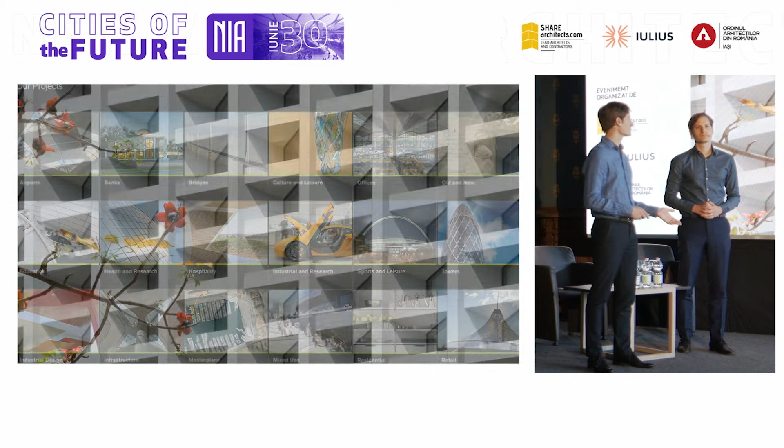Everything you'll see here is our colleagues, it's our buildings, it's our way of working. I hope this explains a bit of how we work.

We have always believed that great design makes a difference. However hard, however uncertain, we still believe in that truth, that in some way we can contribute to a better world. By further pursuing our holistic approach, by entrusting in our people, we lay the foundations today that will help you design for a brighter tomorrow.

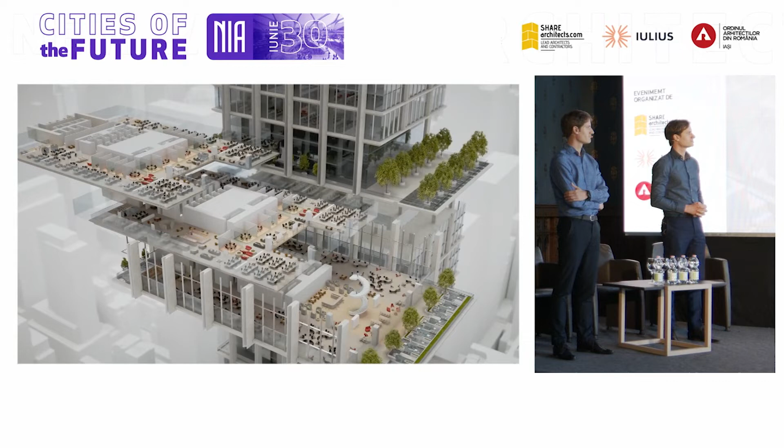Diversity leads to richness, inclusivity, strength, collaboration. Our future leaders stand among us today, those who dare to dream, those with ideas that reach far into the global community. They will carry this responsibility into a future yet unknown, redefining travel, mobility, the way that we work, the energy that we harness, the medicine we develop, the cities that we build, the planets we will inhabit.

Creating a balanced world of nature and humanity, where creativity, connectivity, and sustainability drive our society, working alongside the catalysts of change, the thought leaders, the vision makers, the game changers.

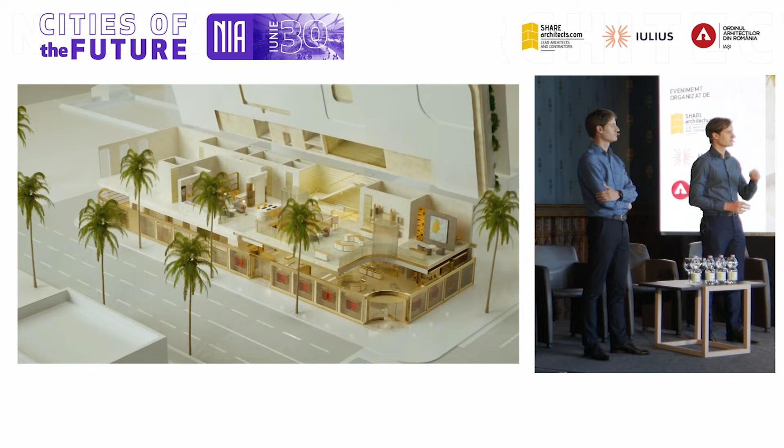We endeavour to improve ourselves, to nurture a workplace you can be proud of, to acknowledge and meet the challenges of an ever-changing world. We are the designers, the innovators, the problem solvers, the drivers of what we will become. In your hands, the power to make a difference. We can be at the heart of helping to design a better future. We have come a long way, but the journey has just begun.

I think it's a good ending because it is one of our dear projects, the Apple Park. I think probably some of you know we worked for 7 or 8 years on that project. But of course we're here to talk about Iași, which has been an amazing journey for us - actually at the opposite pole in terms of how respectful and how careful we've looked at it.

So the few topics we'd like to take you through today about the project, about Iași, is why we love Iași, the context integration, the public realm, a bit about the development, the residences, and sustainability.

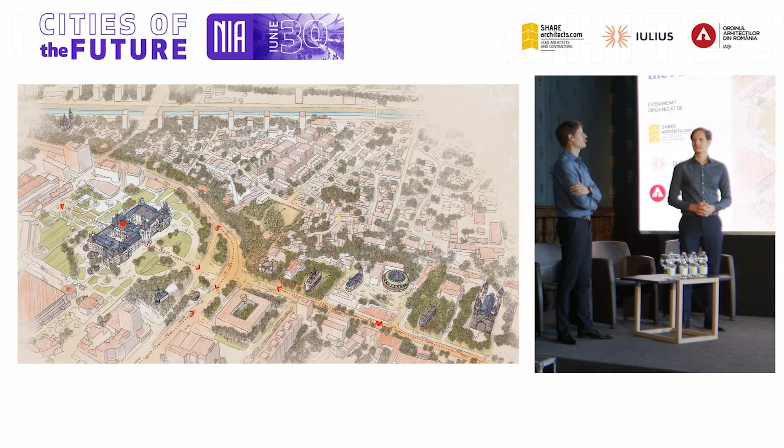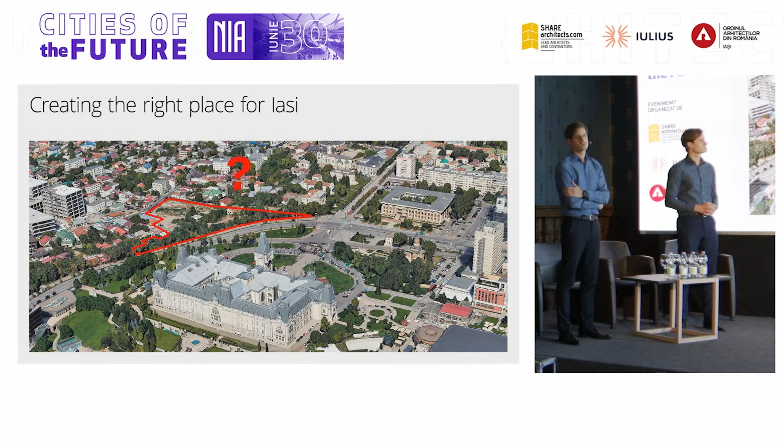We came here, we sketched, we know every single monument, every single street by now. It was quite daunting, I think for all of our colleagues, to figure this out, but there's so much going on. We're now confident we understand it all. We sketched the environment to get a sense for the scale, for the intricacy of details, and how people actually perceive the space.

So the main question is, what do we want to achieve here in Iași, and what do you require? And we mentioned this, it's a balancing act for us. It has to be respectful of its history, but also futuristic. It has to be respectful of the heritage, but visionary, and so on.

All these different components, and we have to find the right answer for Iași. It's not an easy answer, but we had some help. The Iulius group organized all this—without them nothing would have happened. But the people of Iași also gave their opinions, and we took that into consideration.

It has to be a place for the people, a sustainable city, a green city, a university center, and so on, but also, in a corner, an architectural icon. So we've tried to balance all that. The experts, the jury—we had a tremendous brief that helped us all develop the project. So all these came to mind: sustainable, friendly, nature, complex, historic, innovative, a catalyst—all of these.

So for us, the vision for the project, for Iași, is to be sustainable, friendly, residential, the public realm, a historic heritage, and a destination for the entire city.

So we went back to our London office with a lot of energy. This is our team—we built models, we sketched. This is our professor from Stuttgart sketching on the Masterplan. Nick Haddock, our head of landscape design, found out he's got relatives in Iași, so imagine how excited he was to do the landscape design, and so on with the sustainability team. We also reviewed it very often with our most experienced, most senior people.

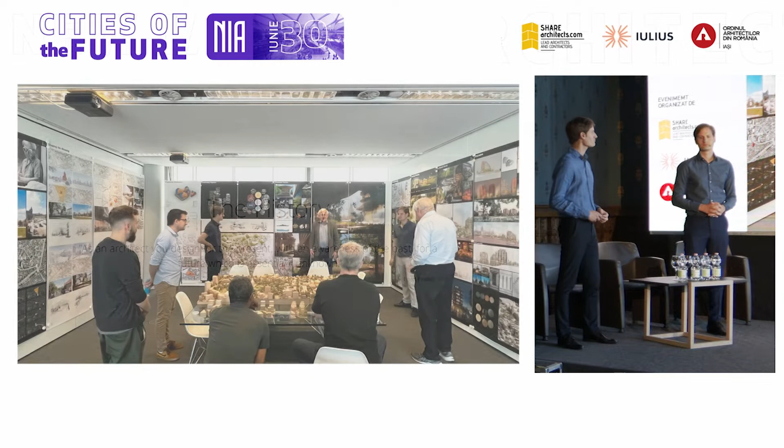So it all starts with history. As an architect, you design for the present with an awareness of the past, for a future which is essentially unknown—a quote from our founder, Lord Foster.

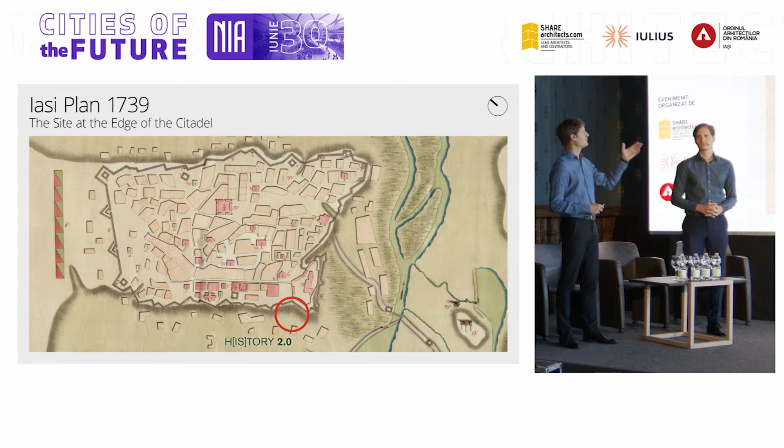So we did that extreme analysis, going into depth of what Iași is, and one of the key factors for us was that the site was always at the edge of the citadel, just outside its boundary. But it was also built closer to the front if you look outside where the current building is—it created a plaza. And everything beyond that was floodable, and actually almost a slum for many centuries.

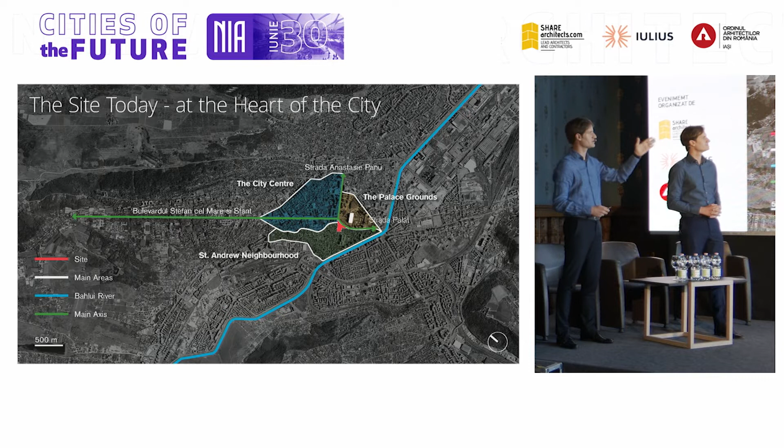When the river got channeled and contained, St. Andrew managed to grow and develop, and that was the opportunity. So now the site, because of that, is at the center of all these major axes and at the center of the city, and has amazing potential.

For us, the main idea is to bring life from the Palas Park all the way down through the heart of St. Andrew, down to the River Park, and make that also a feature in the future.

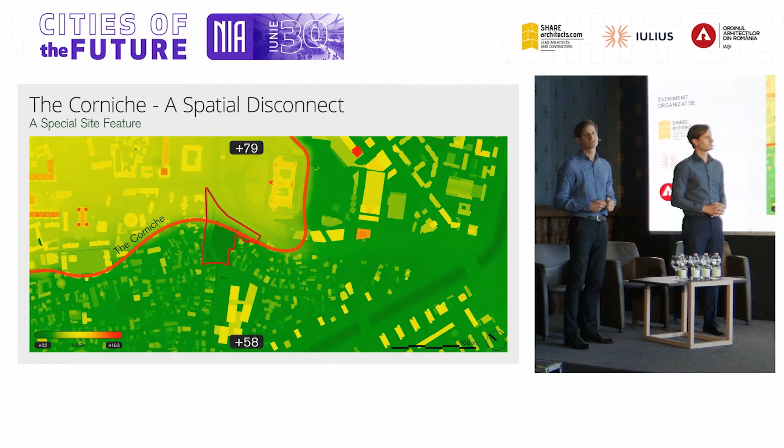We looked at the topography, and here we found this: you have a large level difference which goes all around. And you've seen how successful the slope is at the Iulius Mall—we have a similar opportunity here to create a southern and southwestern facing area for people to enjoy.

We looked at the streetscape and saw there's not much connectivity linking down towards the river. So the opportunity, which I think many recognized, is to connect through with pedestrian links, but also vehicular links, almost like stitching the city together.

Enhancing the public realm, lighting and orientation, the outward views for the apartments to ensure the best quality for the inhabitants, and stepping the gardens back.

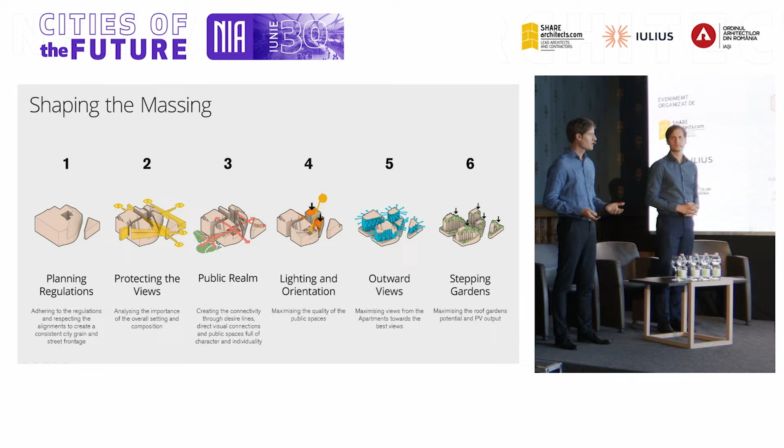So, almost like a sculptor, we started shaping the massing. The planning regulations are clear—we're personally very familiar with them, being Romanian, so for us it was quite easy to determine the setbacks and everything that had to be.

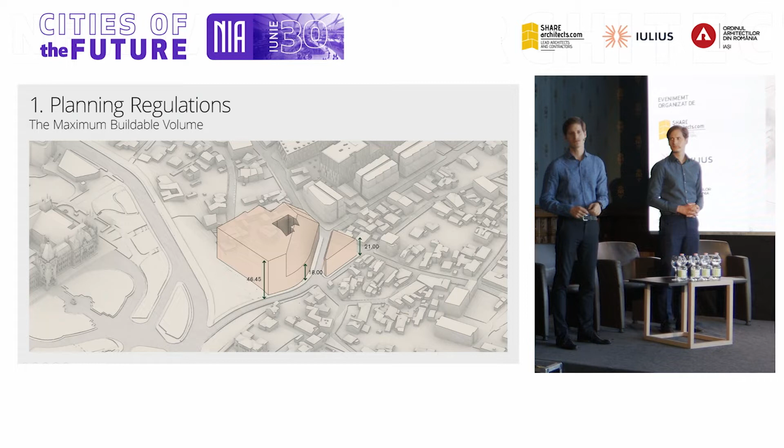This is the maximum volume allowed to be built on this site—a bit taller at the palace, gradually going down towards St. Andrew. That was already a clue for us, showing what the city is trying to achieve. So we started this view corridor analysis, and we did it really thoroughly, but we'll come to that.

We've predicted what people flow would do, what the desire lines are, and created connections to link the active zone from the palace place down to the river. And this resulted in further cuts through the massing.

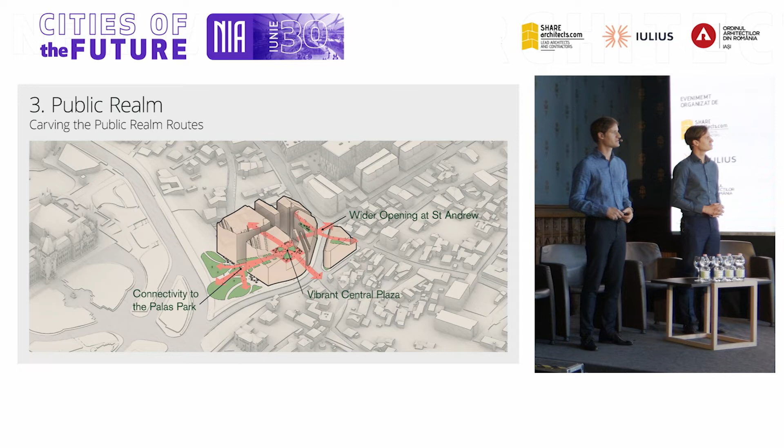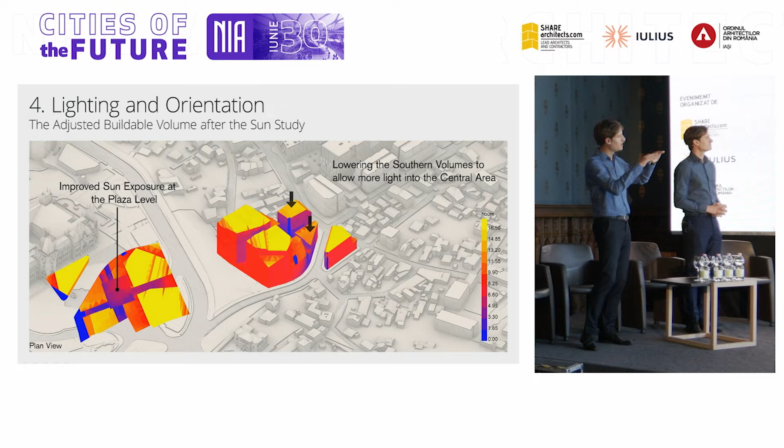Sun and getting light, the right quality for the spaces, but also for the accommodation, for the apartments, is really important. So we mapped the sun on this maximum volume and realized there wasn't enough light within that central plaza. There's a piece of the land which we're not allowed to build on, it's the regulation. So that for us remained unbuilt, and the result is by lowering those volumes substantially, we managed to get the southern and western sun.

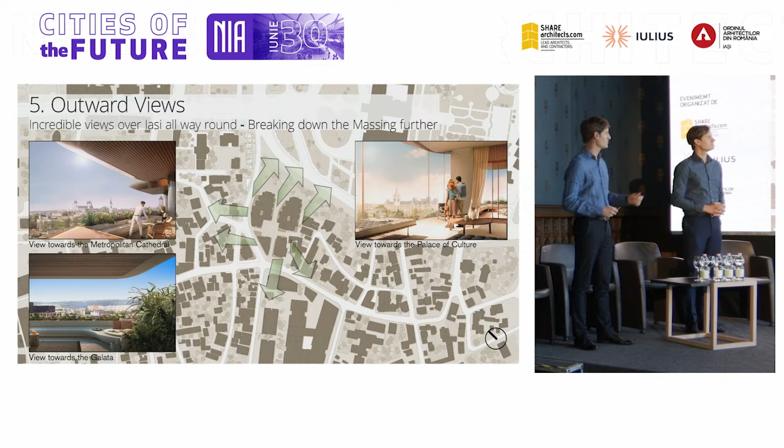This is the volume. And then, of course, for the apartments and the quality of those, the best views, looking at the palace and looking also towards the city and also Galata towards the south. And we've run that parametrically to study and prove that everyone has great views out.

The final step is this stepping terraces towards the St. Andrew Quarter. It's providing this landscaped environment, a garden, quality for the apartments, but also helps us run down towards a different type of grain.

We did loads of studies. We play with models, and we've tested them. And for us, we think there's almost like Cinderella's shoe - the building has to fit within the given parameters which we've studied.

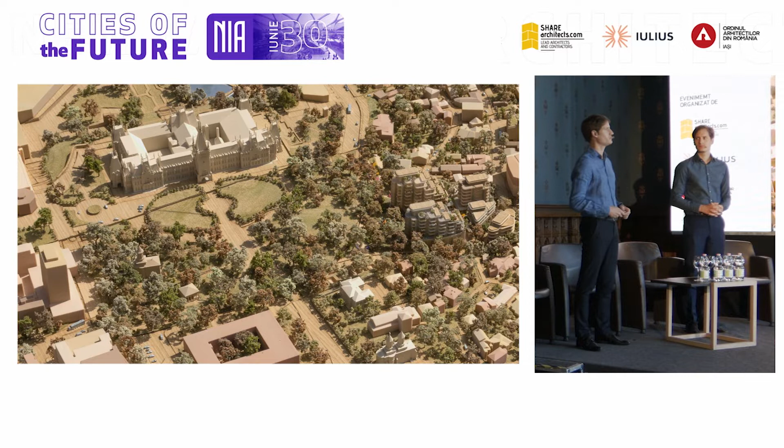Yeah, and this is another model. That's how we work. It's almost impossible for us to detach - it's the best way to look at it. There's a model downstairs, but we've done it ourselves as well, just to understand it better. And it has more context and more activation.

So protecting the views will go quite quickly. Everyone has done it, but we can assure you this has been studied in thorough detail. And there's protected views, sensitive views, and complementing views.

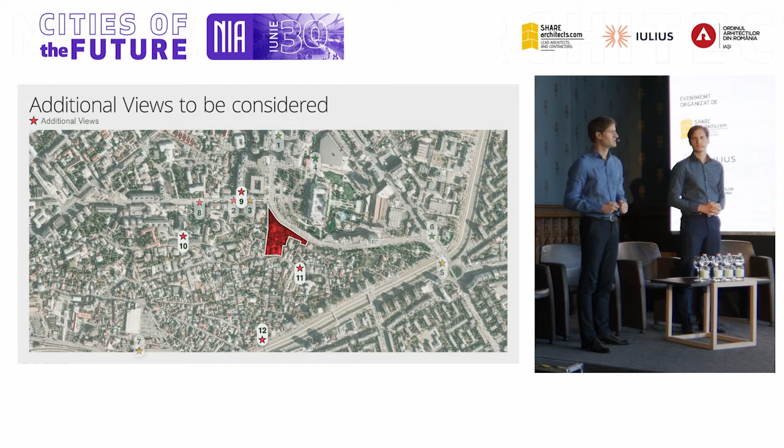All of Ștefan cel Mare, as you walk through it, you should never see the development. It doesn't matter how important it is, it doesn't matter how beautiful it is, you should never see it. So the massing in its state is always hidden behind the monuments.

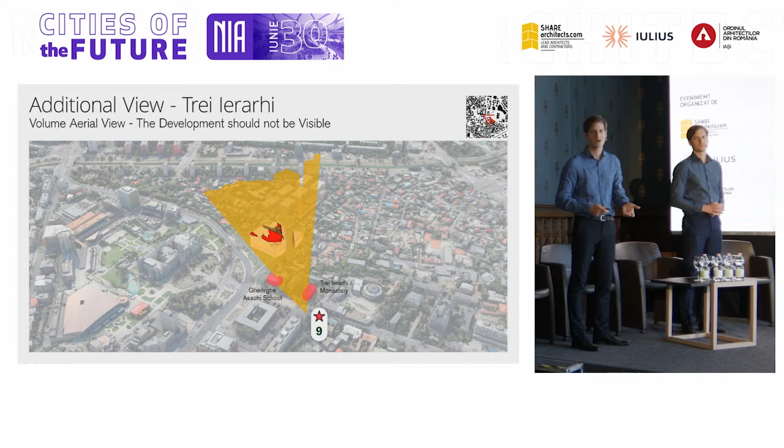There's one particular view, if you go to the other side of this street, where you could see a bit of it. So the immediate step for us was to cut it off - you can't see it. It's conflicting with history.

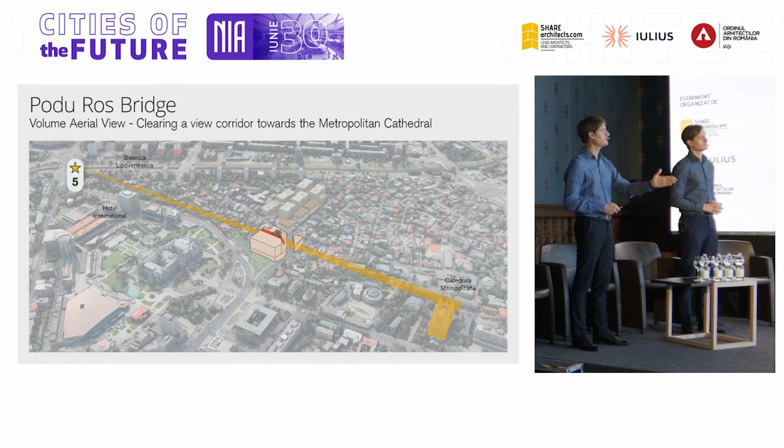If you go to Podu Ros, you can see the Metropolitan Cathedral, Cathedral, and you can see the overlap of the building. Again, immediately, we want to remove that. We want to have this view corridor, to see the cathedral. So the cut goes right through the volume.

You barely see it. But also this opportunity while you're there and you walk around to enhance the riverside. So for us, it's looking outwards - it's not looking only at the site, it's looking at the entire city and finding moments.

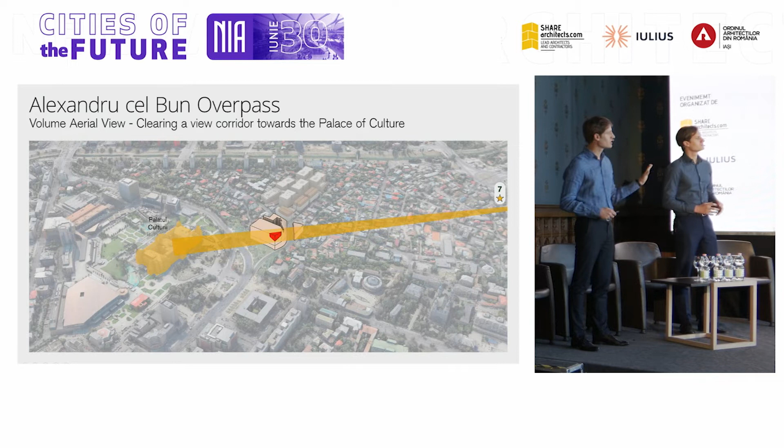Another important view, maybe unusual, but it's the palace seen from the overpass, and quite a big overlap with the maximum volume. So here, we cut a bit more in order to allow for that tower and most of this building to be visible from all around the city. This is always going to be the main protagonist of the city.

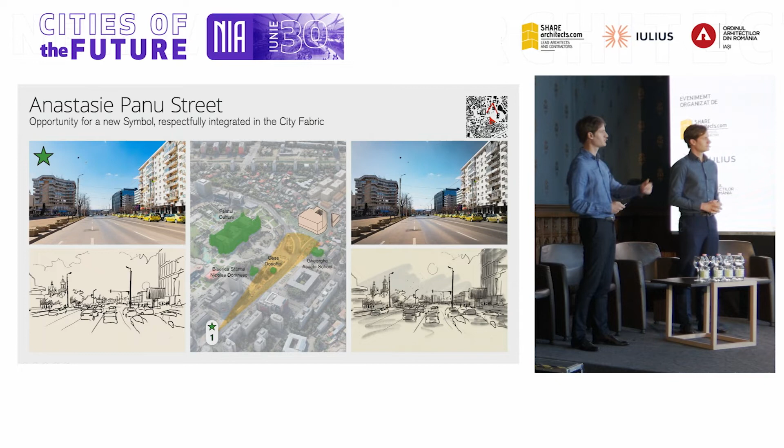And there's some other views, yeah, where you complement. The building becomes part of the composition - it's end of the perspective, in this case, or within the palace place.

And we've tried to break down the massing, scale it down to start meeting the height requirements for the old monuments. We've also done a few additional views because we walked around the streets and found out that there's really important sight lines that should be protected.

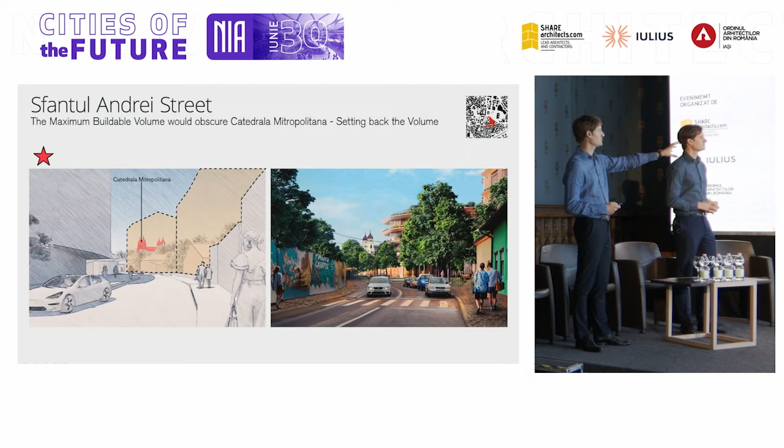Similar from St. Andrew, as you walk to that street, there's a visual connection to the Catedrala Metropolitana, and we can recess the volume or cut it in order to allow for that view to happen.

And finally, this view from the river, towards the Sfântul Nicolae Domnesc. End of perspective, really important for us to see it. So from the river, get the connection to the plaza all the way there. So another cut through the massing.

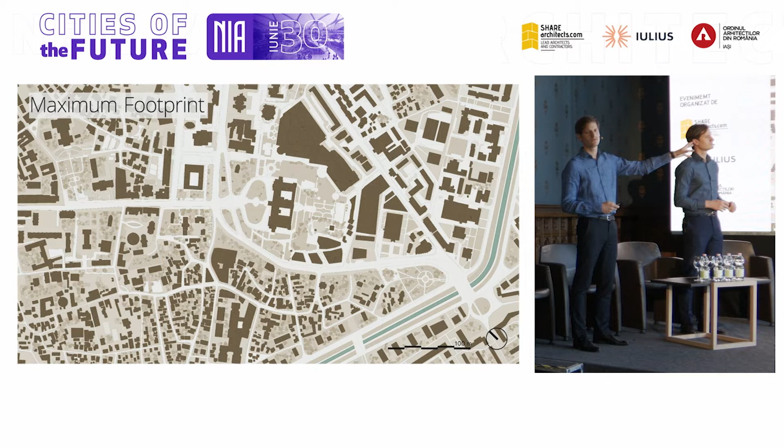So after all these steps, from this maximum volume, which is the regulation - you can build this - we went into shaping it to a grain that we think feels very integrated within the fabric.

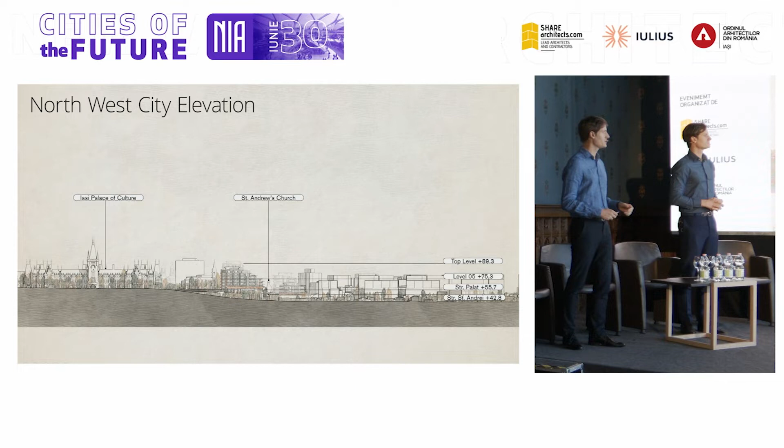Larger buildings to the front, the smaller grain towards the St. Andrew quarter. And also in a section or elevation, you can see the palace is still always the king of the place, and our building is creating a front and is gently stepping down towards St. Andrew, always below the palace.

In terms of the development, the building itself, a few ideas so you understand how it's structured. The public realm is for us the most important thing. It's a high space, everyone can go through. It's public. This is a gift for the city from everyone, from the developer, from everyone.

The residential is clearly separated. It's a more private program, and we want to keep it separated in terms of function, acoustic, and so on. And below the services, the parking that's required per law, also as efficient as possible, because the more efficient you do that, the more quality you can have at the top.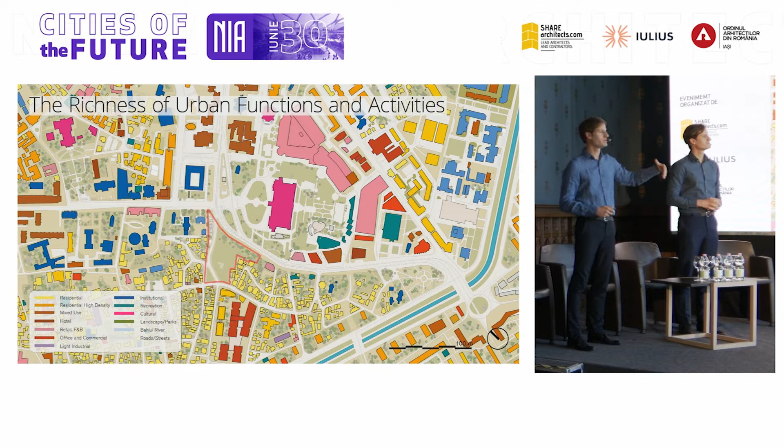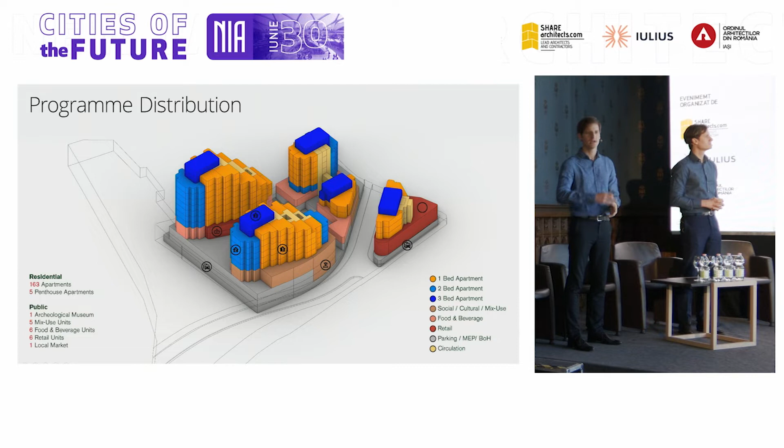In terms of program, residential primarily in St. Andrew makes a lot of sense to have some of that on our site as well, and then the activity towards the palace. So that's basically how the massing works for us, very simply. Parking, the whole commercial or public space at the ground plane and first floor, and everything above is apartments, very well structured.

The public realm is the most important thing of the project, and it's structured around the people of Iași. We took into account everyone's opinion, and we wanted to create this place as vibrant as its people, very diverse. From the palace place, meandering down a landscape path into a contained plaza, which can be the heart of this place, and then further down to St. Andrew, where there's another little plaza.

I think the project should be called History, just a little annotation - that's probably the title of the entire competition. For us, it's probably the Heart of St. Andrew, that's the title, which is more appropriate probably.

The heart of Iași is obviously this place in front of us, while that can become something that relates to this, but also to the St. Andrew neighborhood, which was always somehow forgotten in history. So it's a really active place that is programmable all the way throughout the year. You can do events there, and you can have people meeting.

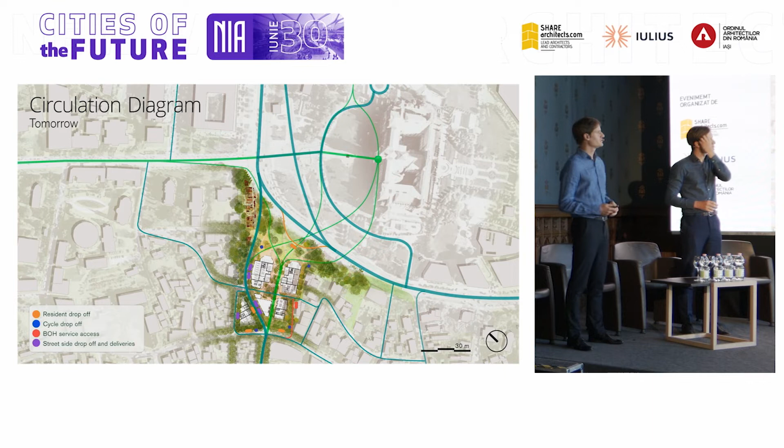Day one is where we see the development today, structured around the plot, and we've designed it so that all the cars stay on the outside. You don't bring drop-offs onto the site. We want to enhance the public realm as much as possible.

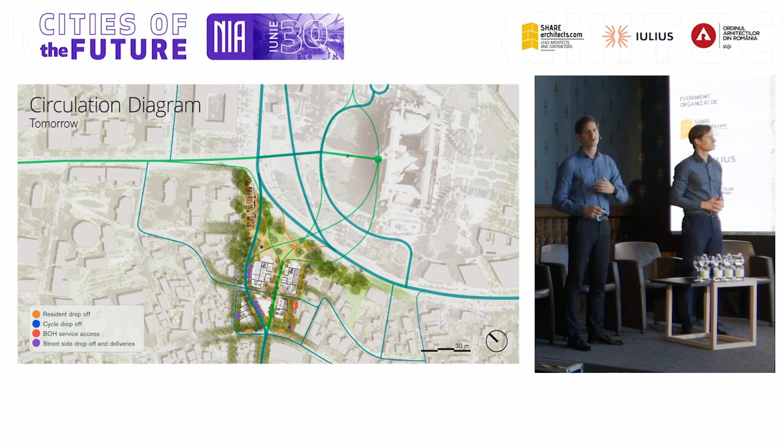It's all a park. But the opportunity we saw here is in the future, where Anastasie Panu and Palat Street could be connected through an underground connection. And that could open up this whole thing to the palace. It's pedestrianizing this area and connecting the Ștefan cel Mare to the palace entry.

I think that's years ahead. We don't know if that's possible, but for us, it became a dream. And we think this could be a real contribution to the city as well. So really a pedestrianized area, a large park.

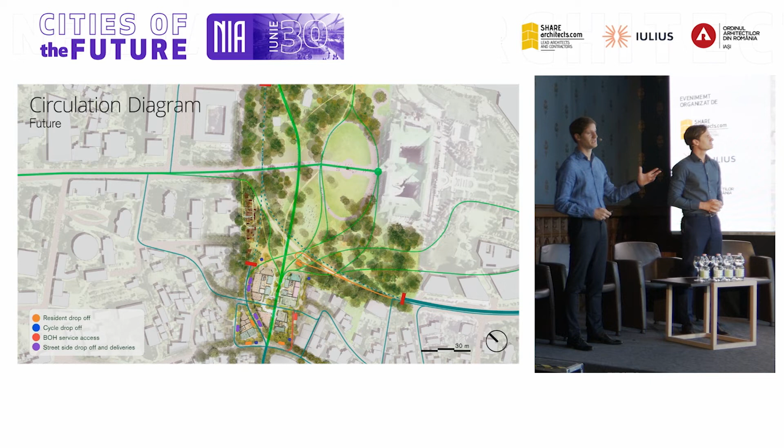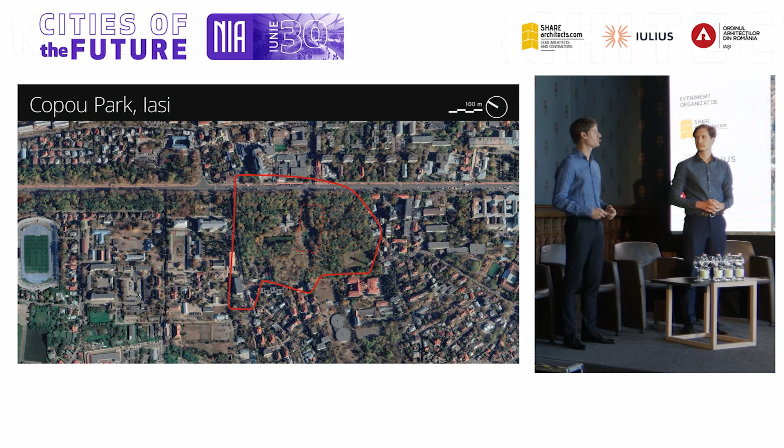We said, how can we quantify that? How can we explain it to you? It could create a park that's 11.5 hectares, the size of the Copou Park at the end of this axis. So you have these two poles, two amazing parks within the city. Some scale comparison - Jardin des Tuileries in Paris, for example, or Green Park in London. It could be absolutely amazing having something like that.

Landscape-wise, the concept is to come from a classical landscape towards a more naturalistic one, towards the base, towards the river. It's a clear reference to the formal part of the city, the palace plaza, and then the more natural riverbanks. We even worked out the palette. I told you about the landscape architect on our team who found family here - he got really excited. We have a native palette here as well.

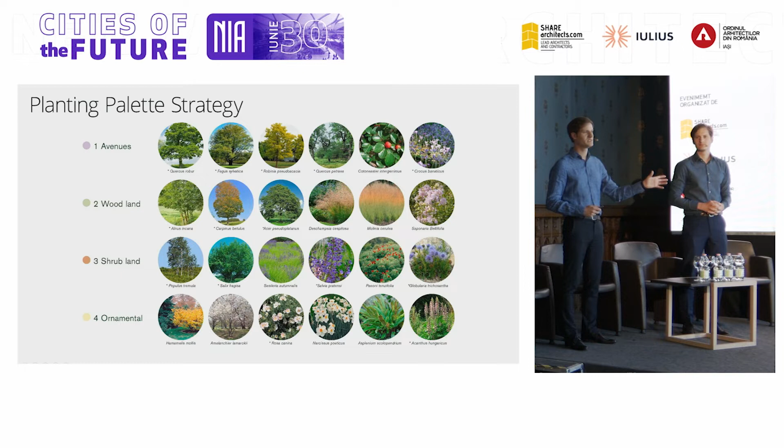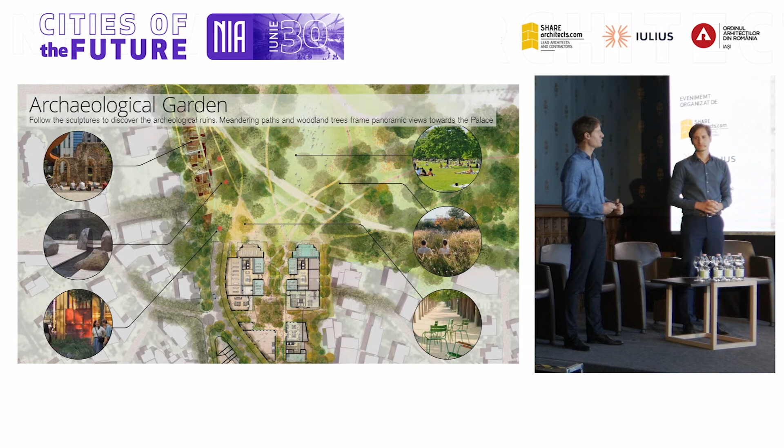The archaeological heritage and how we enhance it - we have an exhibition space and a gallery within the left-hand side building.

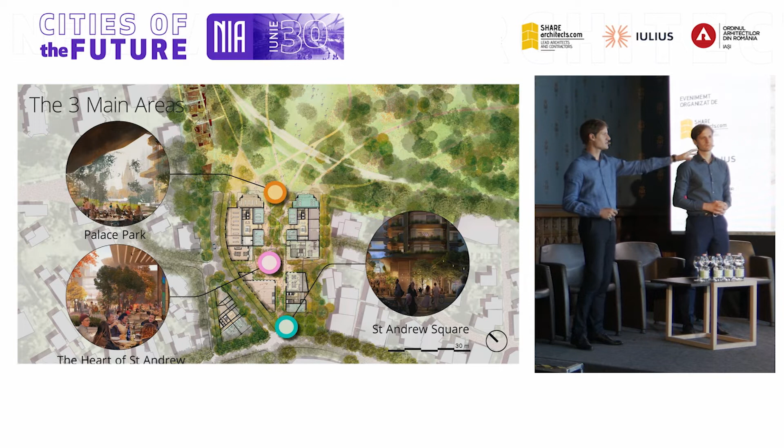There's 3 moments within this project: the park at the top, the heart of St. Andrew, the central plaza, and the St. Andrew Square at the base. This is how they relate to the topography. Topography gives us a chance to create different moments, different quality of spaces, and it should be super vibrant and varied.

The St. Andrew area is dedicated to the neighborhood. It's supposed to have little shops, flower shops, the butcher, everything - the amenities the city would need. The heart of St. Andrew is something more vibrant - restaurants, evening, sunset, all of that. And the park, the Palace Park, is a bit more formal. It's what we see here, enhanced.

It's the layout. We have the 2 major buildings towards the palace, a bit more formal. We have larger mass here, and then as you go down, you have the 3 smaller elements facing the St. Andrew neighborhood.

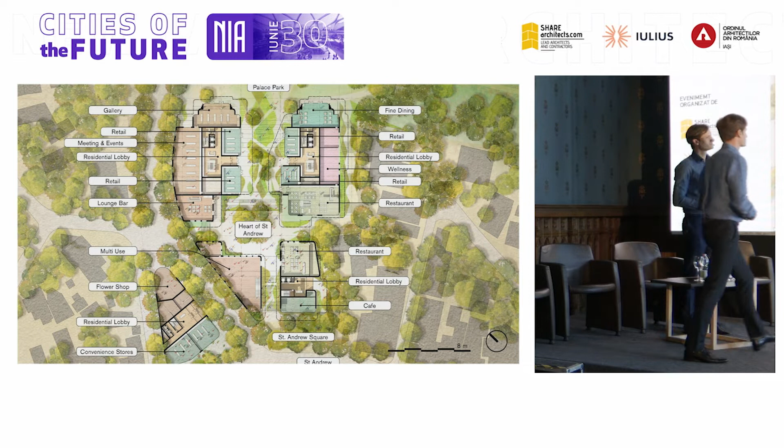Really important for us was to activate the streetscape as well. The opposite side might get improved as well, and we think this should be a pleasant walk down the street towards the river. It's not only about the internal circulation.

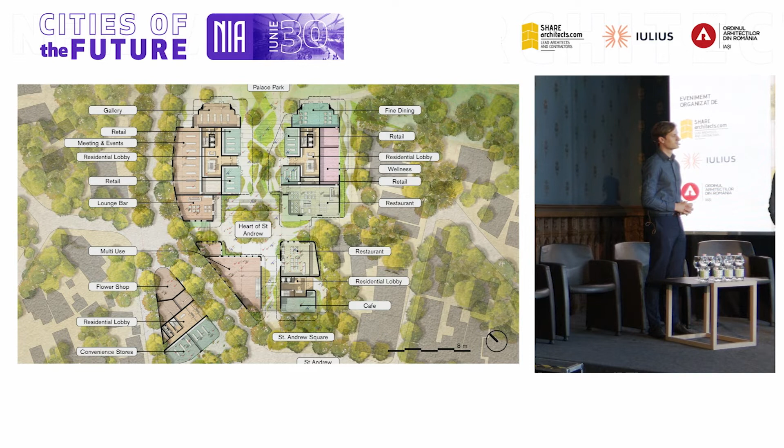The heart of St. Andrew is clearly defined, that's public space. A really interesting thing that we wanted to bring here is the quality of the outdoor space. So we're giving 1,000 square meters of covered outdoor space.

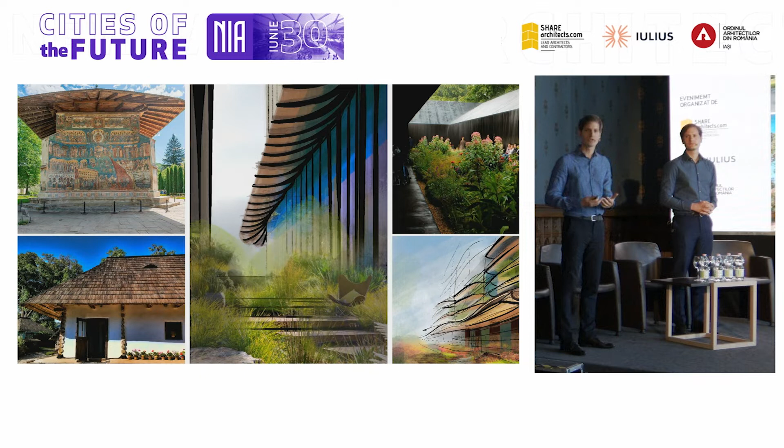This idea came about, which is really embedded within the Romanian, Moldavian way of thinking. It's a very sensible approach to how to be outdoors when it's raining, when you have too much sun, how to protect the building. And we took that a step further, because we know the climate actually wants this.

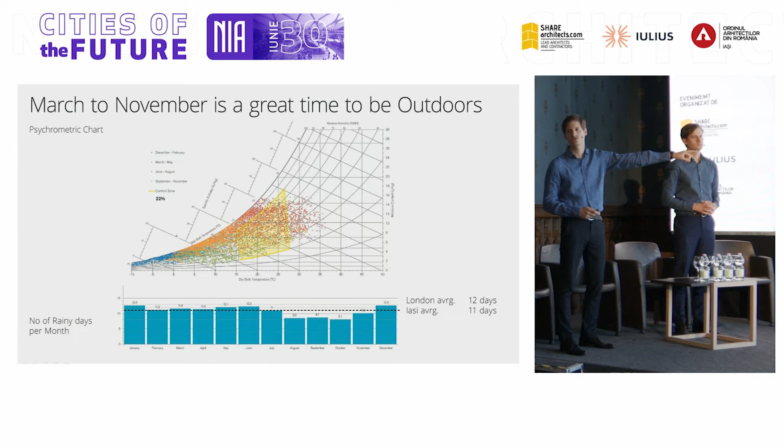There's great quality from March to November. You can stay outdoors, enjoy the weather, but it's also quite rainy—almost as rainy as London. So you want some protection.

This canopy also provides you privacy from the apartments above and creates a clear separation, which we think is required. People want their privacy. The warm materiality—we think the future is happy. The future should be warm timber, maybe stone, something pleasant.

It's a place for the city. And as you move down to the heart of St. Andrew, you get larger height, people enjoying the outdoors. It can be almost like a Rockefeller moment. People come there to enjoy all seasons.

And of course, the view corridors—you can see all these different historic elements and the connection to the monuments.

Coming down to St. Andrew, this is a much smaller scale dedicated to the neighborhood. Reference to the river, a little water fountain. People can stay and enjoy the evening sun.

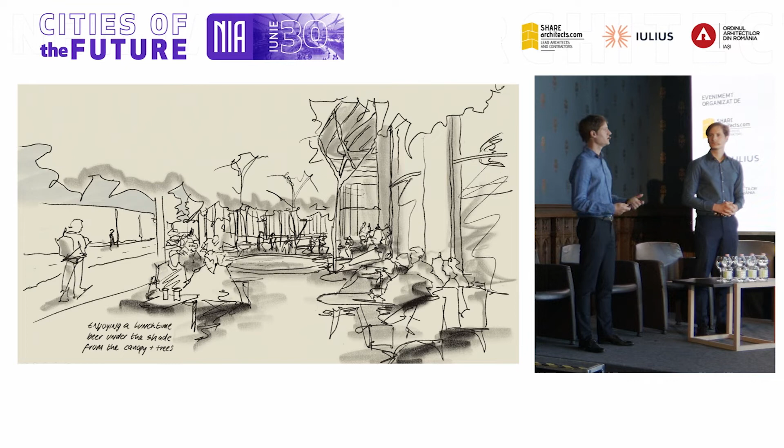This is orientated towards west and towards south, so you can imagine in the afternoon enjoying a coffee or a beer and having the sun—it could be the best moment of the project.

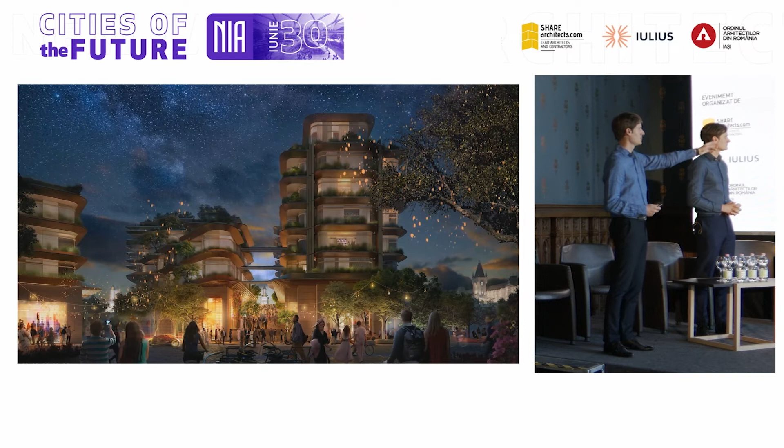And this is the view in the evening for the neighborhood. It's a smaller scale—people come in from these little streets and they find this oasis. And still, you see this connection to the old city, the old part: Trei Ierarhi, Sfântul Nicolae Domnesc, and the palace.

In terms of parking and the building, for the architects and those more interested, I think the key point we took from this was to try and keep it as efficient as possible. We've created that large block at the end, which contains most of the parking.

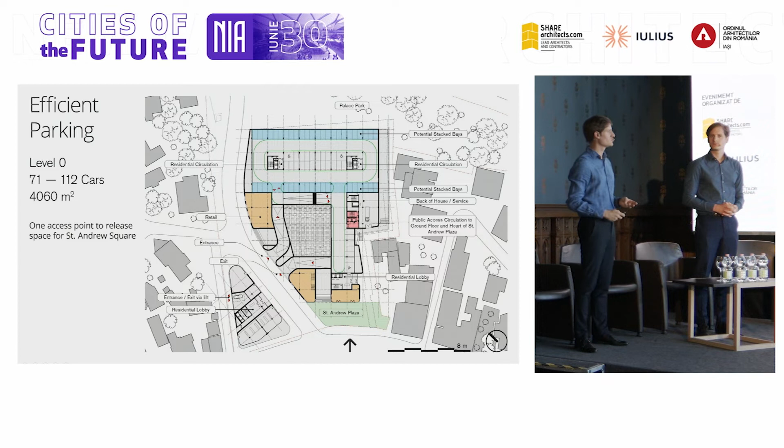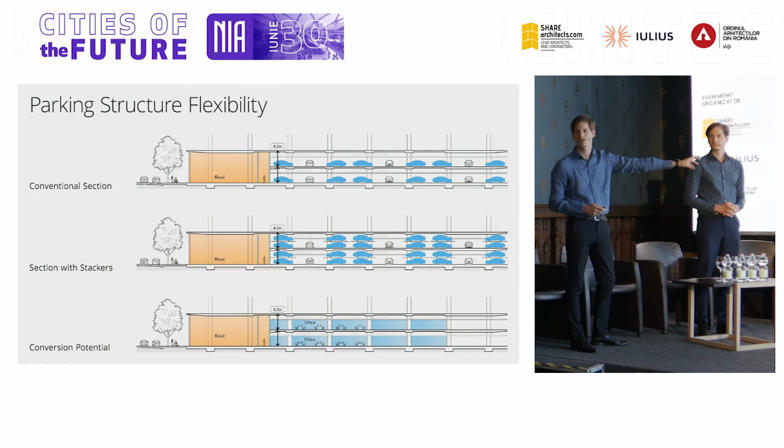We managed to do it over 3 levels, which allows us—I think our best gain is to future-proof the building. So in the future, you can imagine maybe there's not so much parking required, because of self-driving cars or closer proximity. So you can transform the conventional section, either putting in more car parks or actually transform it into offices or retail or anything you want.

So the ground floor and first floor can be transformed in the future. As you can see in this plan, it's parking now, but in the future you can actually have offices, or further commercial opportunities—shops, kitchens, restaurants, whatever it is. So that's a big future-proofing component.

Coming to the residences, this should be a proper address for its inhabitants. It has to be successful also for the client, for everyone. It has to be a viable project.

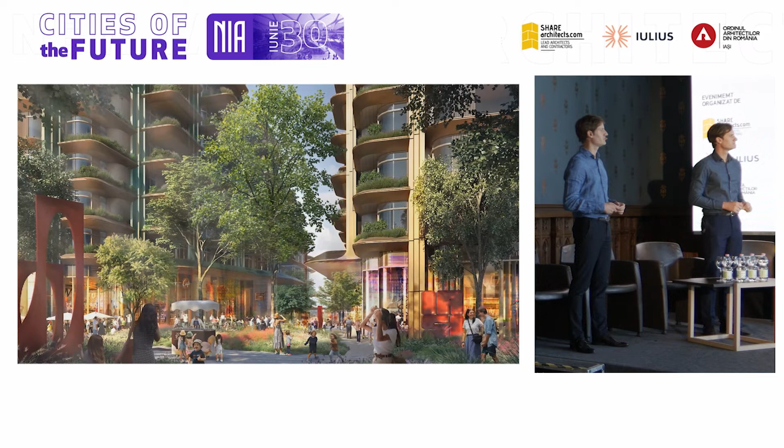So we think we've tailored it in these 5 buildings, all of them being slightly individual. The ones at the Palace we call Palace residences, and the St. Andrew residences. Quite discreet entrances in these ones.

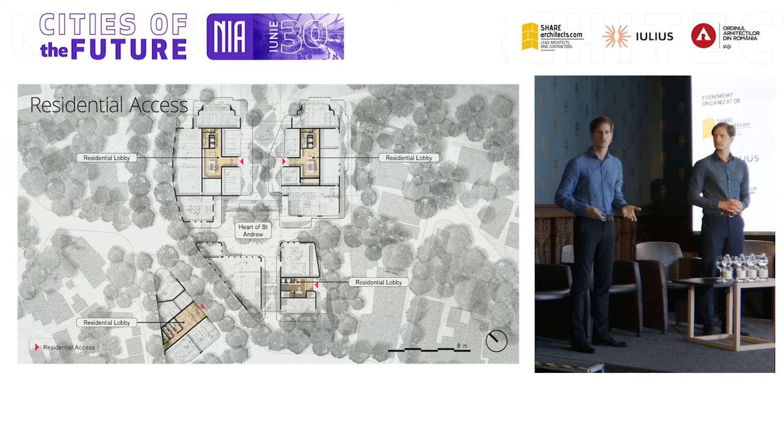You come in gentle, but then the space opens. There's large residential lobbies, and we wanted to emphasize this verticality. The atriums are open, and you can see over multiple floors, so you have a grand sense of entry to your building.

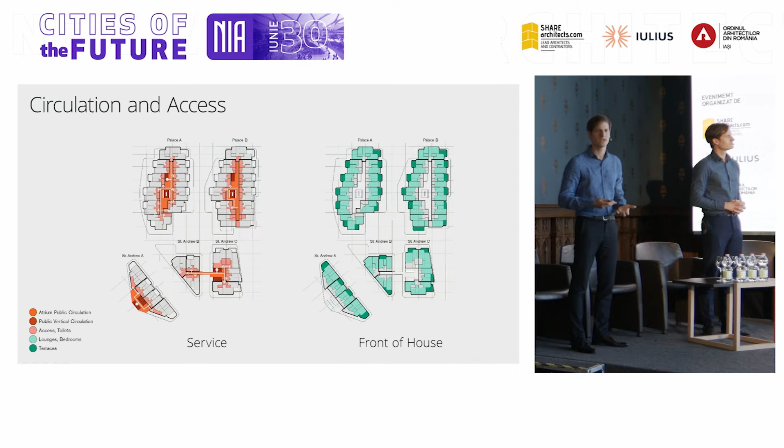Simple layouts, everything around the central atriums and the cores in terms of functions, and then all the front of house spaces—living room, terraces, bedrooms—all facing the views out.

Everything has great quality, the 1-bedroom apartments, the 2-bedroom apartments facing the most incredible views, and each building has a penthouse at the top, a 3-bedroom apartment.

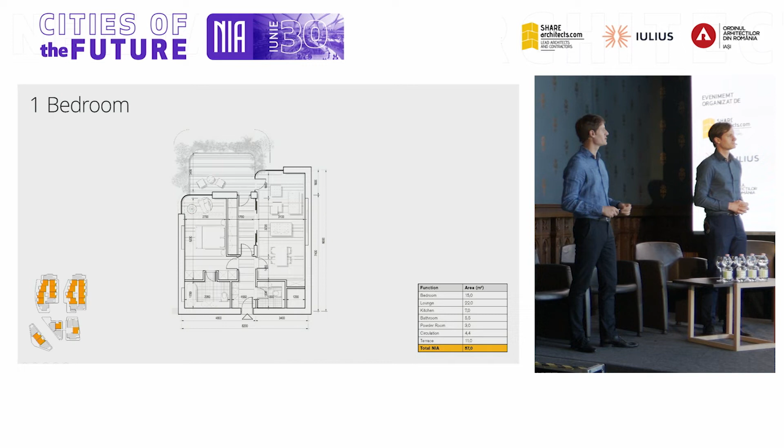Just as an example, this was the brief. Very small 1-bedroom apartments, but for us, for every single one, we want to ensure quality. So you come in, you've got the living and kitchen that can be closed, a large terrace, very important, because people start enjoying their homes more and more now and got used to spending more time there, and an ensuite bedroom. And this, I think, has quite a quality, the planting as a filter, etc.

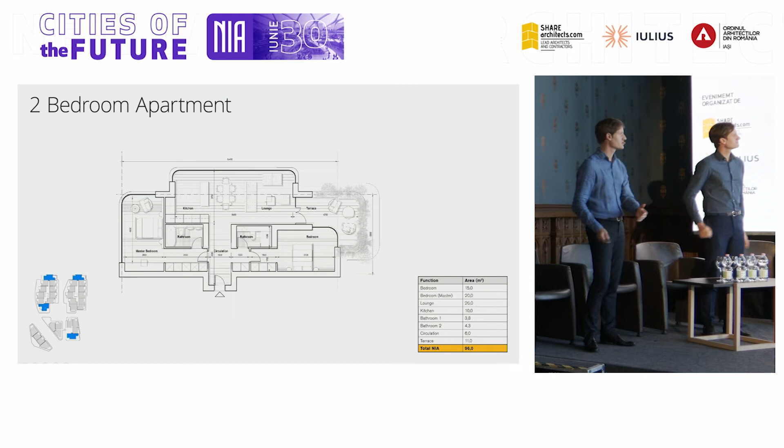I think also worth saying is every apartment type has this corner condition, so you get diagonal views throughout from each and every condition. The 2 bedrooms, these ones are facing this place, the Palace. You're coming in centrally, you've got this longitudinal living room with a terrace, and just quicker, this is the view you would get. I think it's really incredible for whoever moves in here.

And then the penthouse, these are 2 stories, large double-height living room, terrace all the way around. And you can also access the upper floor through a service route from the 2nd floor.

You want to talk through the vision?

Okay, in terms of the vision, I think for us there are a few components. It's the verticality, what we recognized. Every building in this city, or the majority of the important ones, the Palace, all the churches, the Catedrala Metropolitană, they all have a common theme, it's verticality. And we tried with our concept to express that.

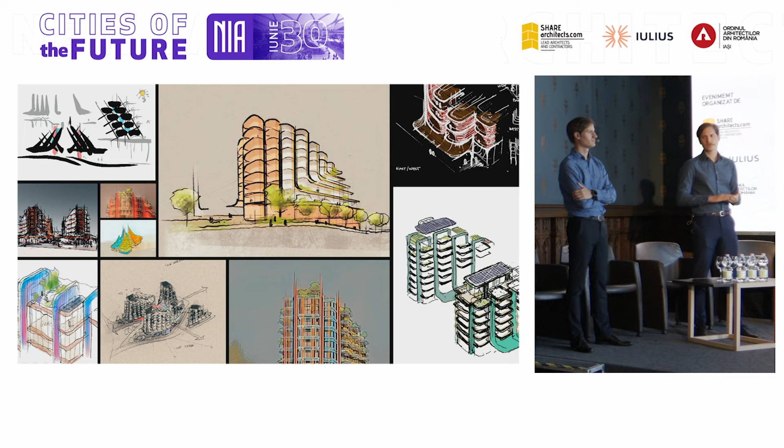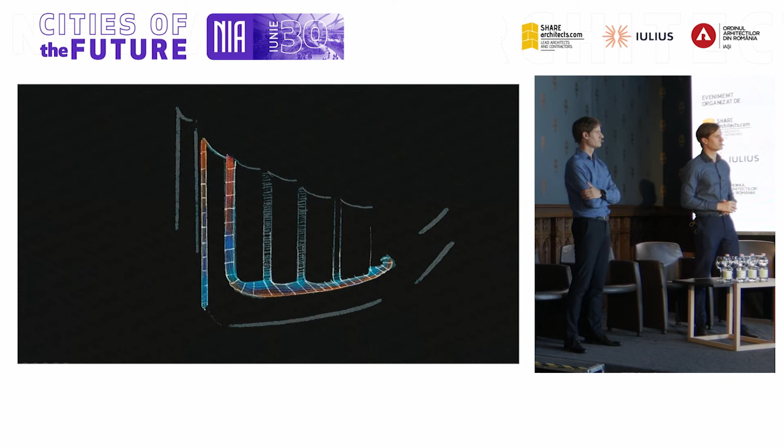The other one was the horizontality of the canopy and this overhang, which creates this intimate feeling of being under the canopy, being in this warm and friendly environment. So taking all those on board, we developed this with a strong presence at the Palace, the enhanced verticality, which also creates this slender, minimal appearance, if you'd also imagine it outside, and then translating it into the horizontal plane. This can create quite an iconic and striking appearance, we think, which would work very well in relation with the Palace and with the existing fabric.

And you can imagine it in a few years with the park in front and the whole landscape coming to life. I think this is what we're looking to achieve, this real openness of the space, the building leading you through to the next piece of development in the city, the river probably, and creating this permeability through the site.

I think materiality was also one of our topics we thought about really in depth, and we wanted to make it of the place. We found inspiration in all sorts of materials and buildings, and something that drew our attention is the terracotta or tiles. There's a lot of craftsmanship in it, in local history, but we, of course, want to give it the innovation and the twist, it has to be very performing.

It can be large formats of super bioactive ceramics, which can do self-cleaning. They can even do air cleaning potentially. So quite innovative in that sense. And it gives us also the opportunity to separate and differentiate between the 5 buildings, to give them their own identity.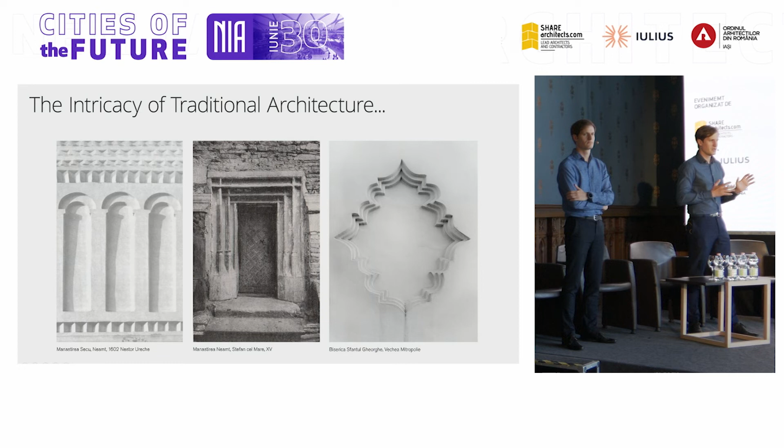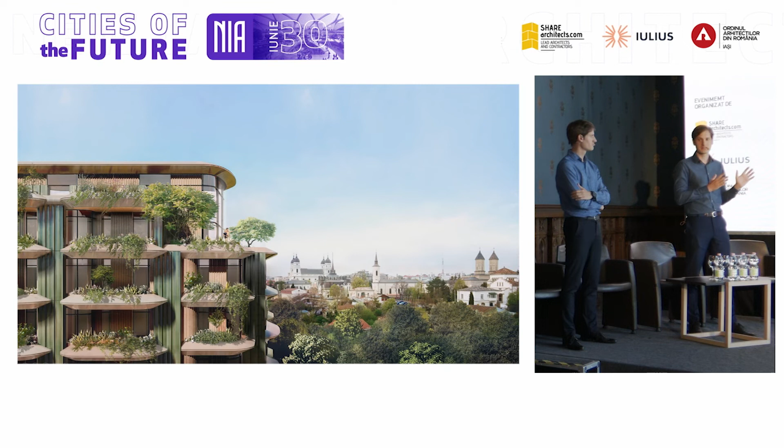Because we're building a part of the city, we're building a small neighborhood with these buildings. And then we found the intricacy of the details as well, which also highlights, in a way, the verticality, but also refinement in the project. And I think this helped us define and create an architecture that is timeless, that would stay and withstand the passing of time.

Sustainability, really, really important for us. We left it for last, but just to make a point. Everything you saw is building the layers of sustainability from bottom up, with a park, with a wellness component. Our office has been doing sustainability, as you mentioned, since the 70s, since it was founded. And throughout every project, there was innovation in that respect.

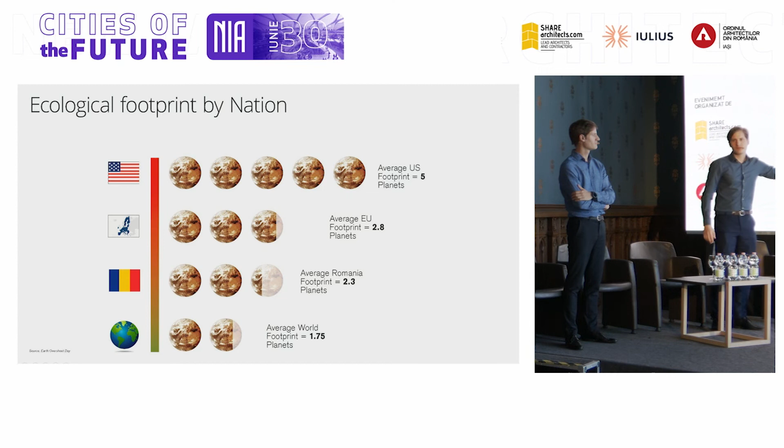Yes, we have a crisis. I think everyone knows global warming - it's becoming more and more evident, and it's also quantified nowadays. So it's clear facts. At the moment, we're emitting much more than the Earth's biocapacity can take. It's going the wrong way. Just to put it into perspective, this is Europe, this is Romania - we're producing 2.3 times more carbon than the Earth can absorb. The US is worse, so we're better than that here, but it's not good at all.

But we can do many things about it. As an office, we've been involved in the Paris Agreement, writing and helping visualize what it means, because it's a very complicated and detailed document. But it says we have to limit the global temperature rise to 1.5 degrees. At the moment, historically, the temperature has risen from the industrial age till now by about 1 degree. We want to contain that.

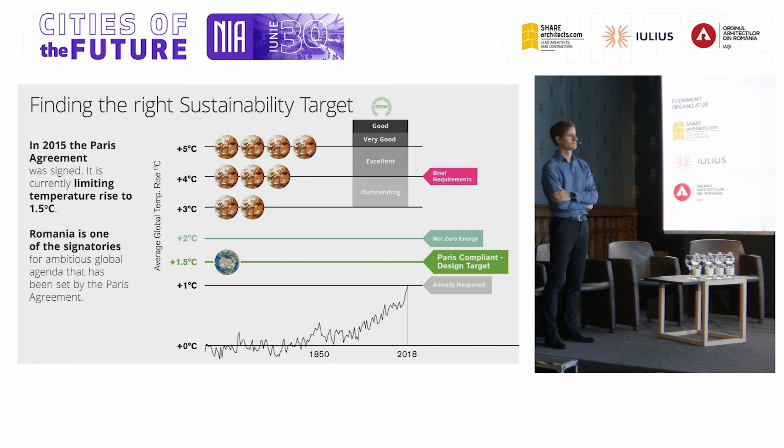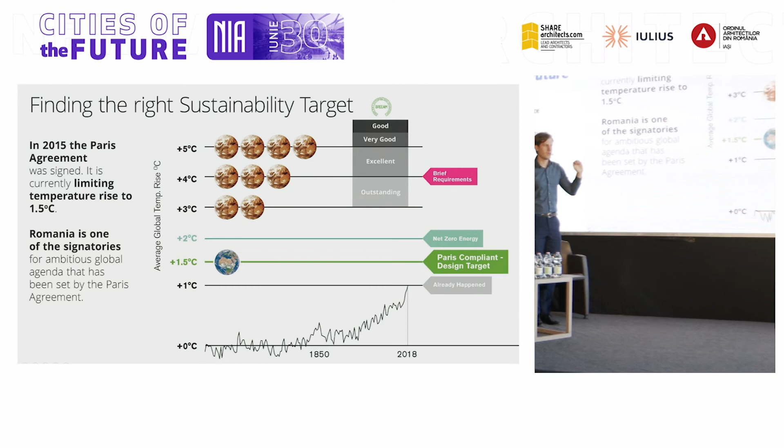At the moment, what the project is doing with a BREEAM Excellent, which is an achievement of course - it's one of the standards, a high standard - it's only achieving, as you can see, 4 degrees. So it's not that forward thinking. We want to try and push the boundaries for that as well. I think we want to do a lot better than that, and we think we have all the tools to do it.

So just to put it into perspective, buildings will have the same fate as cars in a way. Petrol cars are being banned, electric cars - we see it throughout the world - and bad buildings will also be punished in a way. If you're not performing, you're not going to be competing. You're not going to be able to build anymore. So it has to be taken really seriously by our industry.

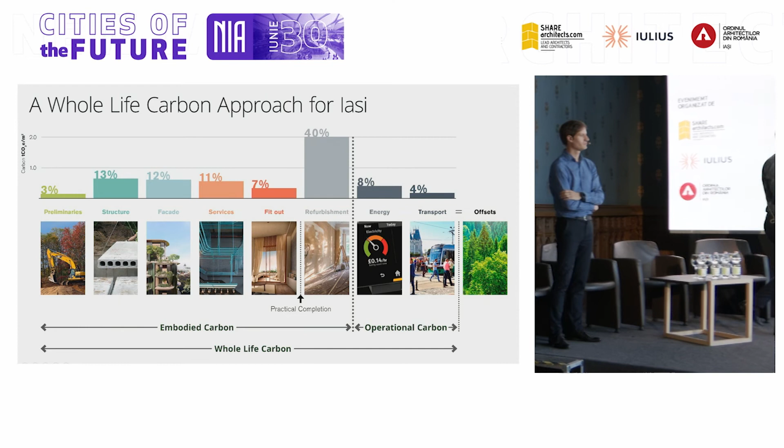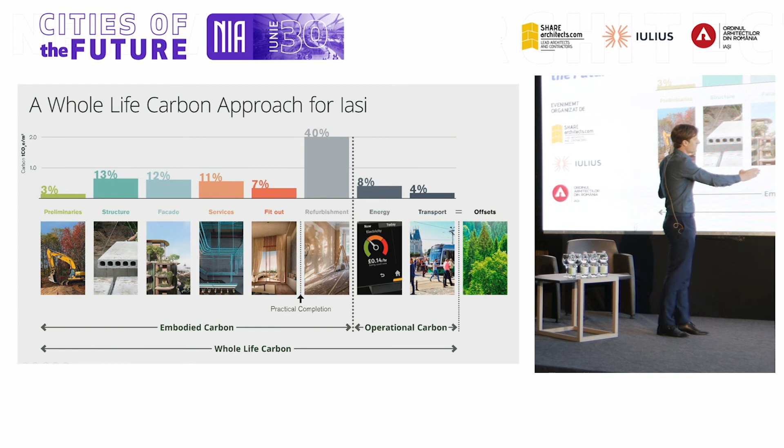We try to summarize it as much as we can. This is specifically for Iași, for this project, in this location. We always talk about operational carbon, what the building consumes in its lifetime, but we have to also address the embodied carbon - how you build it and how efficiently. You can see it's a much bigger component. One thing to highlight is transport - we're very good because we're in the center of the city. That's already a given, and that's something to promote. You have to build further in the city and be closer so you can use public transport and have walking distances.

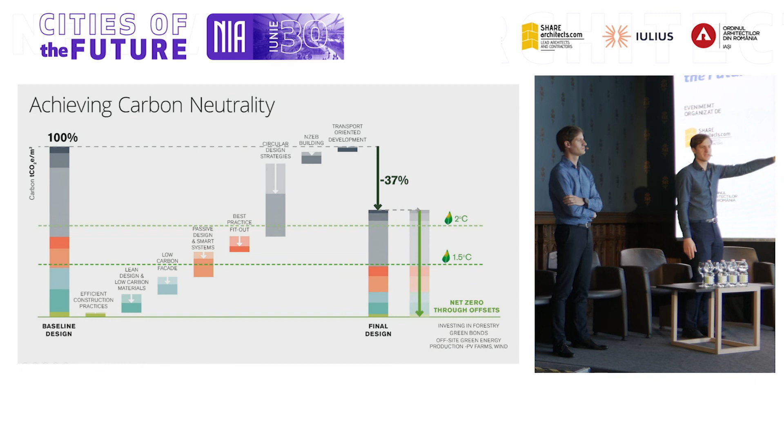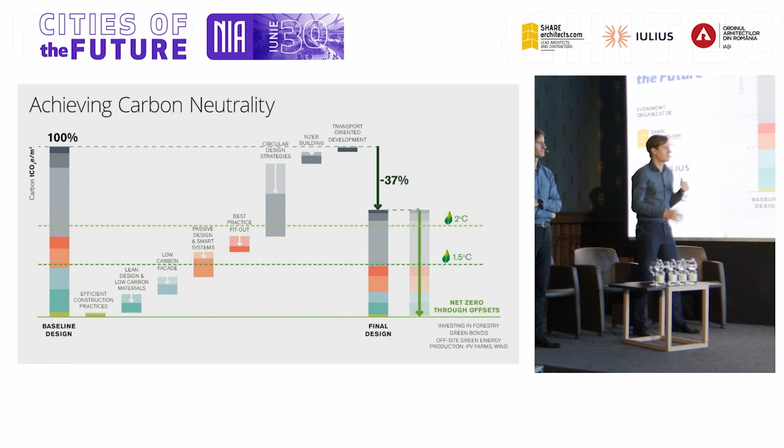Now we have the tools to lower every component we just mentioned, from how you start the project and design, to the structure, facades, and so on. We have the means of lowering the carbon by about 40%, which is already reaching close to 2 degrees, getting close to that 1.5. And then you can additionally push with offsets, by investing in forests or building a park in front, and other things.

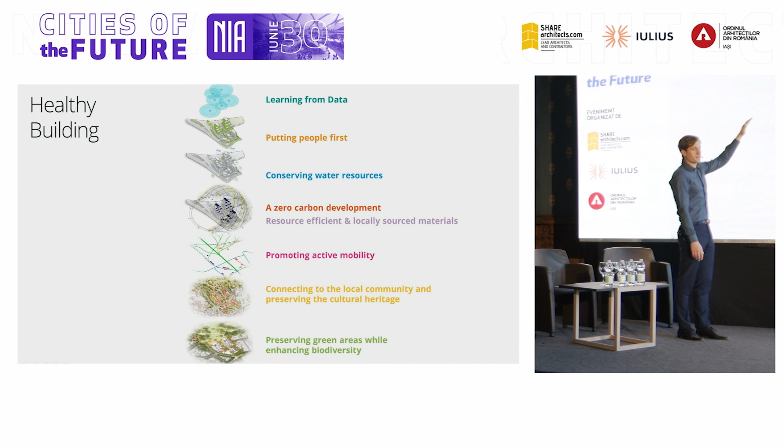So we see it as an organism, the whole building. We'll cut it short, but it starts with the park, the public realm - it's all about well-being and how people feel in this environment. Then it moves to more physical aspects, starting with how the building actually interacts and performs. A zero carbon development, the resources, how you build - is it a concrete building? Is it a timber building? Conserving the water, capturing all that water that rains 11 days a month. Putting the people first, and also learning while operating the building. That ties in very well with the well-being of the people, and it creates this whole quality of the project.

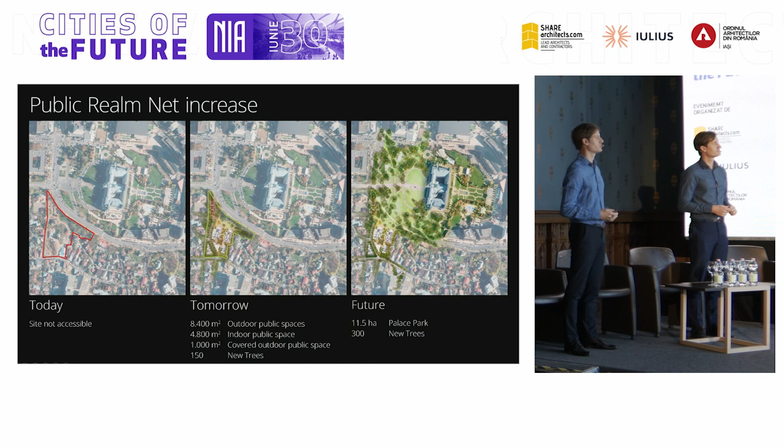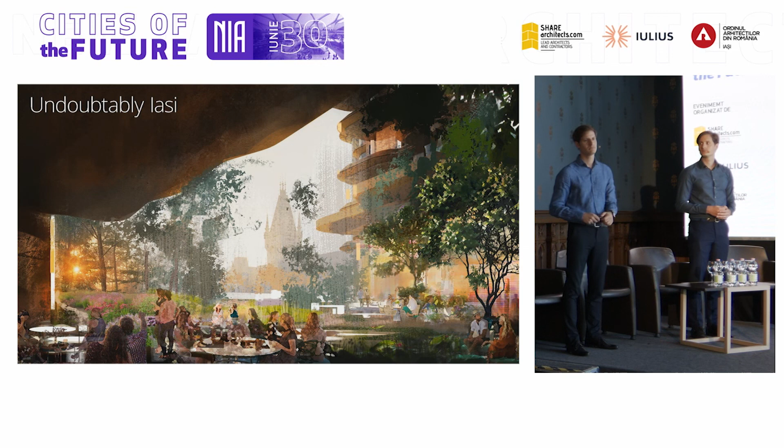Okay, so summarizing the project - what we're trying to achieve is to give a lot more to Iași than just a building or that site, to enhance our thinking through a citywide approach. I think these are the key facts: today, the site is inaccessible, there's nothing. Tomorrow, when we manage to do something, you get quality outdoor space, but there's also further potential which we're really keen to explore. The focus should be pedestrian-focused, nature-orientated and sustainable, respectful towards its history, and diverse, lively, and open. We think it should be undoubtedly Iași - when you see it, you recognize it as a piece of the city. Thank you.